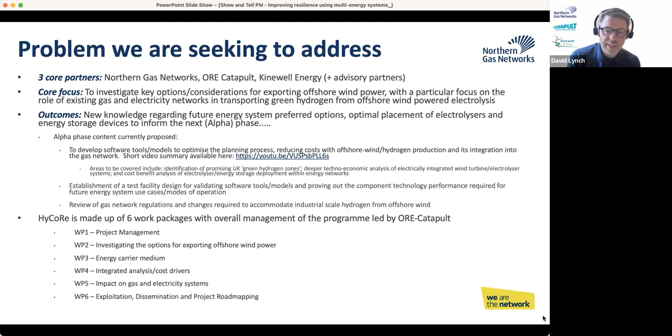What I'd like to do now is just give you an overview of the 4 technical work packages. So work package 2, we focused in on investigating the options for exporting offshore wind power. Here we looked at the best offshore electrolyzer configurations. We also looked at the value of storing energy in the pipeline, and we looked at what hydrogen technologies and test and demonstration facilities the sector will need going forward. So a bit of future gazing on that one.

Work package 3 was the energy carrier medium. Here we used our partner Kinewell's KLOC software to broadly represent and simulate a gas pipeline inter-array system, and what improvements could be made to the overall offshore wind farm design, and use that to make a comparison of electrical versus hydrogen systems for export. In work package 4, we also integrated analysis cost drivers. We looked at combining the outputs of work package 2 and work package 3 and looked at the main cost drivers of electrical versus hydrogen offshore wind systems.

Finally, in work package 5, the impact on gas and electricity systems. Was there an opportunity there to reduce energy network investments through strategic deployment of electrolyzers, and what are the possible locations? And here we focused regionally in an area in Teesside, but in our alpha program, we'd like to open that up to a national level. We also looked at what are the best ways of using electrolysis and energy storage at scale in order to reduce network infrastructure costs. So I'd now like to hand over to James Ferguson from HyCoRe to provide some of the headline findings from work package 2. James, over to you. Thank you.

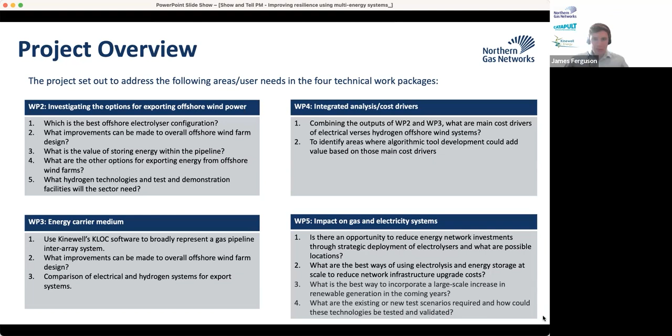Next slide, please. So on that first point about optimal electrolyzer configuration, we see that onshore electrolysis is currently easier, but offshore options have advantages around costs, time to deployment, and permitting, depending on the site and capacity. Overall, though, there was a broad consensus that the cost of hydrogen produced from offshore wind could be about £5 to £10 per kilogram today, but that could fall to £1.50 or £3 per kilogram in the coming decades.

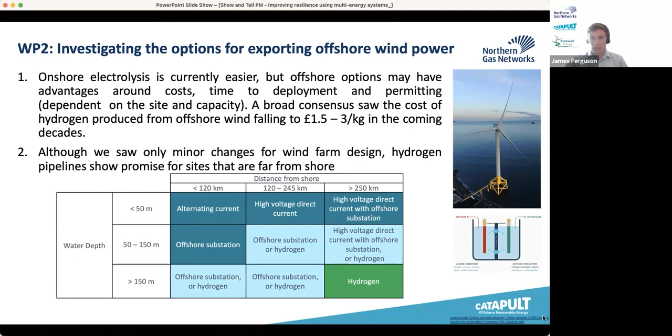Next, we looked at changes to wind farm design, and although we didn't see that hydrogen would enable many changes to the wind farm design itself, we did see that it would be promising for allowing sites that are further from shore and in deeper waters to be developed. So we mapped that out as a function of water depth and distance from shore. Near shore, shallow water, electricity is a clear favorite. As we get deeper and further from shore, there's a kind of tipping point. And then for those further from shore and deeper water, we think that hydrogen is promising. If we move to the next slide, please.

So the third thing we did was a case study with a simple analysis looking at a 100-kilometer long pipeline with a 12-inch diameter. And just based on the pressure difference in the operating range, we found that it could store over 400 megawatt hours of energy through line packing. And on a windy day, this would increase the revenue from a 900 megawatt wind farm by about 1.5%, equivalent to about £11,000 over the 24 hours that we looked at.

Next up, we considered the economics of energy transport for pipelines, electrical cables, and hydrogen shipping. They all have their own niche. So ships are best for long distances.

Pipelines are most effective in high capacity middle distances, as defined on the slide. And cables are the most competitive in shorter distances. And last slide, please, for work package 2.

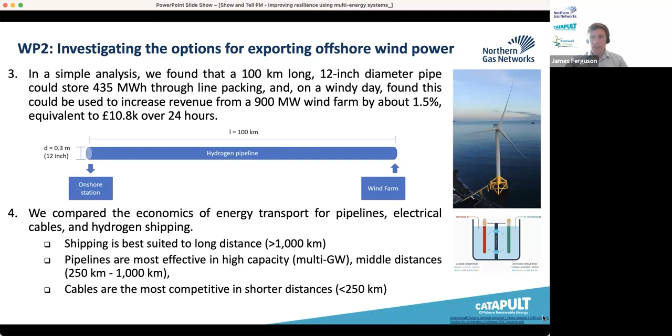We had a look at the new engineering challenges that could benefit from new test facilities. So one of those is how to manage a wind turbine electrolyzer microgrid. And we think we can help advance that question by connecting electrolyzers to grid emulators to enable sophisticated electrical testing, or even to a real wind turbine.

And another example we saw for subsea systems is a question around how can we confirm that current or repurposed pipelines are suitable for hydrogen transmission. So we think there's potential for establishing a submerged hydrogen pipeline test facility. And that's all from work pack 2.

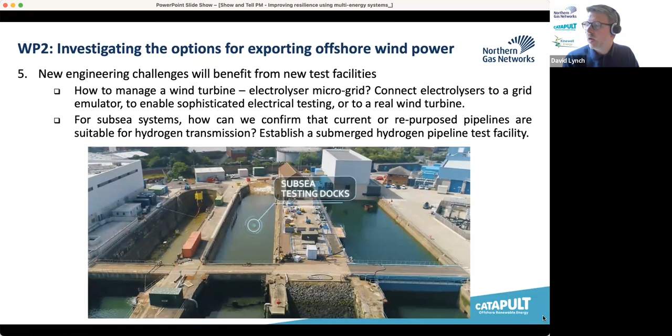Thanks, David. I'm delighted to present the outcomes of our study in this work package, which reveals some exciting possibilities for the future of renewable energy. The implementation of hydrogen inter-array systems offers significant advantages. Mainly, these systems require shorter pipe lengths compared to your traditional inter-array cable systems. But more specifically, we found that this can become cost competitive as we scale up offshore projects, highlighting the potential

for hydrogen integration. Additionally, our research indicates that pipeline systems enable the substation position to be less sensitive to inter-array costs. Now, this provides more flexibility in the overall project design, and savings in other areas of the system can be achieved, such as reducing the length of the export cable.

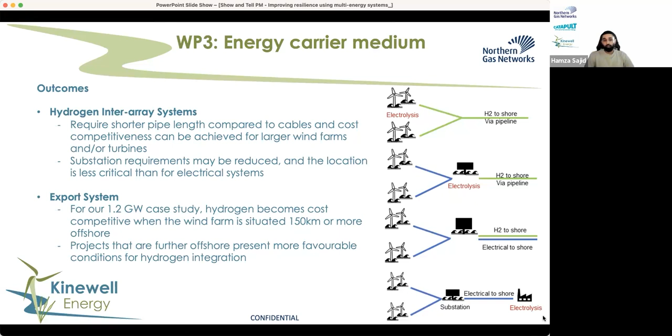Moving on to the export system, we also examined the economic viability of hydrogen for a 1.2 gigawatt case study. And our findings demonstrated that projects situated further offshore present more favorable conditions for hydrogen integration. And in this particular case, we found this to be at distances of greater than 150 kilometers. Now, this is a significant milestone as it opens up opportunities for remote and deep sea wind farms to leverage the benefits of hydrogen integration. Next slide, please.

So when it comes to the inter-array system, we've identified significant cost differences between pipes and traditional cable systems. Overall, project costs with the use of pipes are considerably higher, and to achieve cost competitiveness, it's crucial to focus on cost reduction measures. So specifically, pipe purchase costs need to decrease to 30% of the current cost assumption.

So by exploring alternative procurement strategies and leveraging economies of scale, we can really drive down these associated expenses. Similarly, pipe installation costs need to reduce to 20% of the current cost assumption.

Now, in relation to the export system, we evaluated the CapEx associated with hydrogen and electrical options for offshore wind farms. And our study revealed that some hydrogen systems exhibit lower CapEx than these electrical systems for projects located more than 100 kilometers offshore. Now, again, as I previously mentioned, it's demonstrating the potential economic advantages as we move further offshore. Now, to achieve a fair CapEx balance between both these systems, cost reductions are required.

Specifically, in the case for a decentralized system, we found that the electrolyzer costs need to be reduced by around 25%. Similarly, pipeline purchase costs need to be decreased by about 75%. Now, this means exploring alternative materials and technological advancements to find these cost savings.

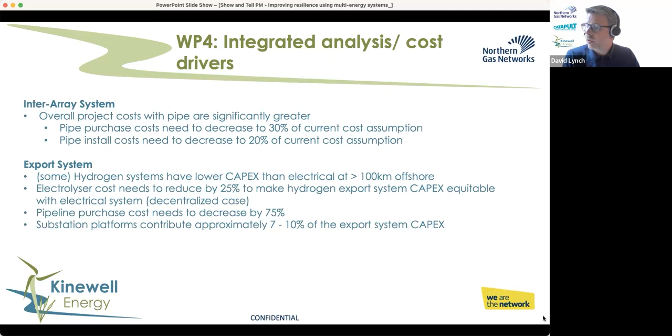So work package 5 was around answering the question around flexibility, and that focused on the impact on gas and electricity networks. So we set out to answer a number of questions. The first question really was around finding a potential location for a future case study in the alpha phase as well. In this, we reviewed the long-term development statements for both the gas network operators and electricity network operators.

One thing we highlighted here that we really wanted to understand a little bit more was the water requirements for a sample in the Teesside region, if we were to go on with a further case study. The second question really was more about how do you actually introduce these hydrogen technologies at scale? And we tried to focus on how that relates to costs as well.

And that showed us that actually the electricity market structures and the existing electricity market design is a key factor that needs to be understood better in terms of how hydrogen could form a reliable participant in the way markets are run. So the question there really was understanding that wholesale electricity prices are a main factor, and to tackle this would be understanding how the new hydrogen strategies for markets would work.

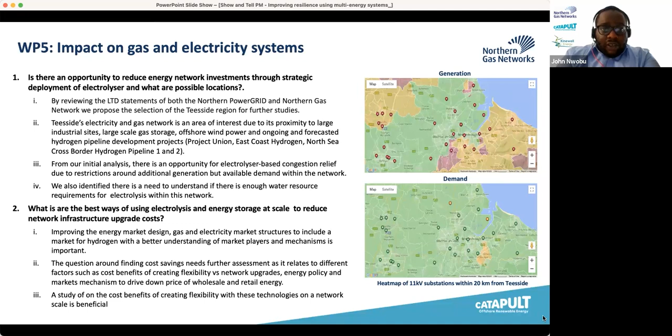The third question was, we've finished with all the aspects around the networks, but we wanted to focus on offshore wind generation, understanding the potential for hydrogen production from that. So with the same idea that we have identified Teesside as a region, we set out to understand a little bit more about Teesside in terms of proximity to existing offshore wind farm sites and how they potentially could be used for hydrogen production.

So we identified that already there are existing wind farms there with capacities above what might be possible to connect to the grid in the future, and there is a potential that some of that capacity could be used for hydrogen production as well. One thing we really wanted to understand was how this would integrate into the network. And we understood that there are existing gas pipelines in the North Sea that can be repurposed by blending hydrogen in as well. This is one of the areas we're really interested in exploring further in the next alpha phase case study.

The fourth question was, as these technologies are going to be integrated into the networks, both electricity and gas, would they actually meet the existing testing and validation requirements if they are to be operated within the network? So we looked at two areas. One is grid compliance, where we realized that there isn't so much awareness on how hydrogen systems, be it electrolyzers and fuel cells, will be connected. And we did see that possibly most of those systems can actually comply, but there's still more understanding needed into how that would happen in terms of the existing policies and regulations.

And the second aspect was around actually participating in the existing markets. So how would you actually trade hydrogen? And we realized that hydrogen as a technology could participate in the existing market services provided by National Grid. But we did see that there's opportunity for a closer, deeper design that will integrate the technologies much better, similar to how battery energy storage was initially introduced into the market. And I'll hand back over to you, David.

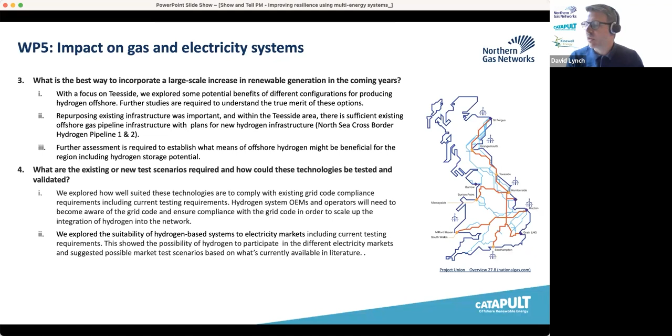Okay, thanks, David. So looking forward beyond discovery phase and what we do next. Opportunities identified: certainly continued engagement with the advisory board, which has been really valuable so far, and there's also an opportunity to widen that project engagement. Then looking at the work package outcomes themselves: work package 2, we've already identified the benefits of test infrastructure. 3 and 4 showed us the value of developing analysis tools. And work package 5, the need for deeper cost benefit analysis for network investments and infrastructure upgrades.

In terms of the potential benefits of those activities, the stakeholder engagement will help us improve our knowledge and also avoid duplication from similar projects. The test infrastructure, two reasons really: firstly, validating our models and also de-risking the key component technologies. And finally, those analysis tools, we can strategically use to greatly assist our future energy system design and optimization. Next slide, please.

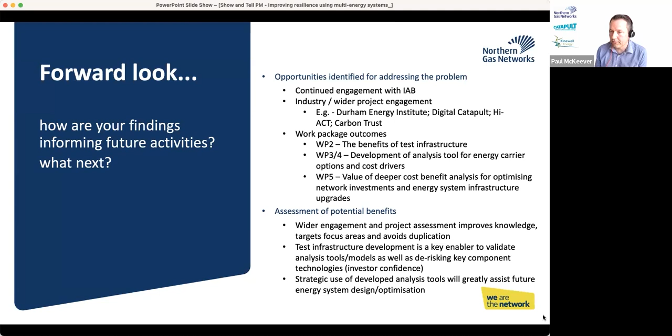In terms of project thinking evolution, one of the big things we've learned in the discovery phase is the value of a regulatory landscape analysis, so that needs to be in an alpha phase program. Thinking about the alpha phase program elements, we'd certainly want to do more technical, economic, regulatory and market framework analysis. We'd want to develop the tools we've identified in discovery for managing systems at both regional and GB system level. Work package 5, further cost benefit analysis, looking at how far we can take hydrogen as a service, initially using the Teesside case study.

And finally, more focus on the energy generation aspect, particularly around wind turbine electrolyzer systems, both from a technical and economic point of view, and also that test infrastructure. So if we can validate those tools and de-risk that technology, then that provides investor confidence before you really start to go into a big demonstration scale activity.

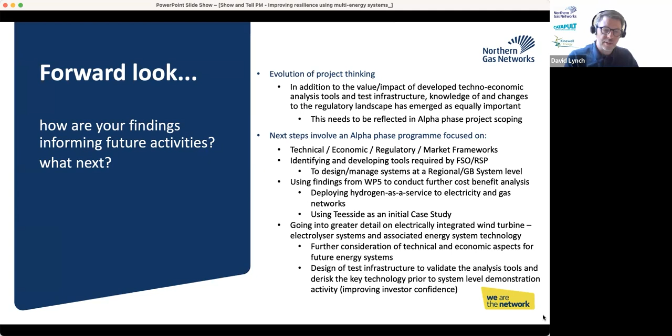So how does building the test facility differ from core BAU activities for the catapult? And have you identified any overlap between programs like the Hydrogen Innovation Initiative?

Shall I jump in there, Paul? Yeah, you can have a go, James. I'm happy to supplement.

Yeah, super. So in terms of new aspects around these test facilities, a big trend that we're seeing is this importance of hydrogen to offshore renewables, and we're pleased to be in the commissioning stages of a small scale system at Blyth that's going to use hydrogen, and that's the first time that we've had hydrogen equipment on site. So although we're used to working with flammable gases and high pressure gases, the fact that it's hydrogen is still breaking a lot of new ground. So we're covering a lot of safety aspects there, and that's helping us.

And once it's up and running, even more so, that's going to help us to tap into electrochemistry in a way that the organization has never done before, and thinking about pressurized gases for energy storage in a way that we haven't done before. And so we're really excited for that.